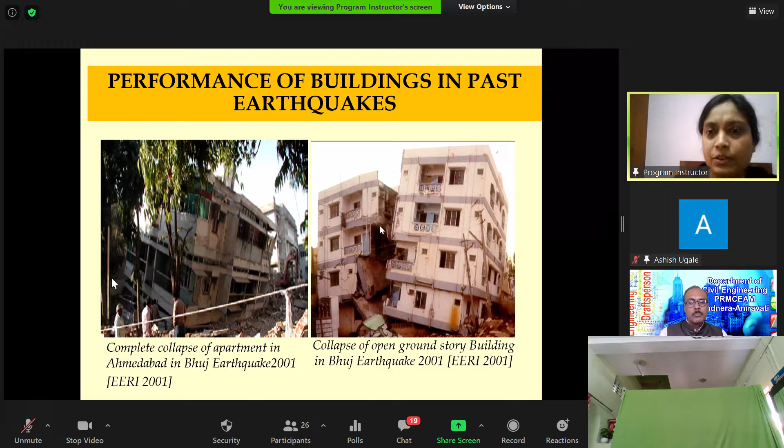Similar incident I can show. This is from Taksila apartment, also from the Bhuj earthquake. We can see two identical buildings side by side, but the left building is intact, whereas on the right hand side building, the entire ground floor has been demolished, and it is not in livable condition. The right hand side figure is from the 2005 Kashmir earthquake, and we can see the cracks

in the unreinforced masonry infills. Unreinforced URM infill is nothing but brick infill. We generally construct these as partition material, and they are generally not designed for by designers. This is nothing but some dead weight. We never consider these partition walls, URM infill walls, as structural members, so we only consider their weight in our design.

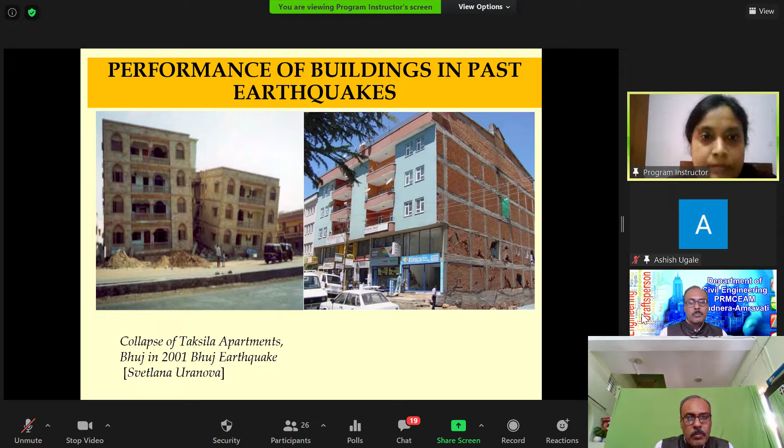But what happens under seismic load, that we will discuss. And since the topic is not only the behavior of URM infill RC frame buildings but the modeling of those, what is so special about modeling? Why do we want to do that?

Modeling, first, there are distinctly 3 different types of models available with us. It can be subdivided further, but if we just try to have a glimpse of the types of models, we have 3: the physical model, the analytical model, and the mathematical model.

The very first figure is of the actual structure, actual phenomena, as I have written, actual structure or physical phenomena. What happens is we want to model this, either as an analytical model, a mathematical model, or a computer model. In the computer model, what is happening, I will tell you. So when we are trying to simulate the actual structure, first we accept that

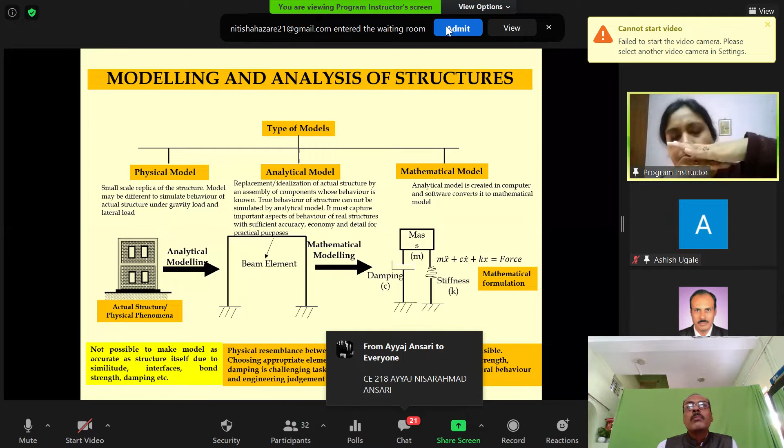it is not possible to model each bond between the reinforced concrete, that means the reinforcement and the adjacent concrete above and below it. It is not possible. It is also not possible to model the damping.

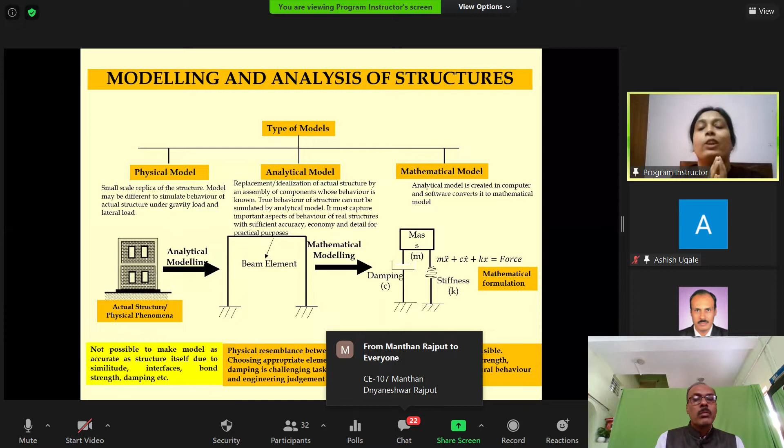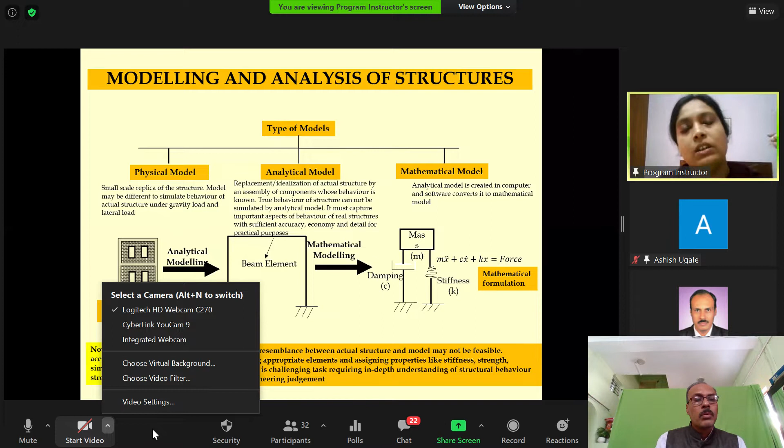What is damping? Damping is a cumulative phenomenon which opposes the movement of the structure when I apply some lateral load, and under that lateral load, the building tries to vibrate. This damping also includes the friction between the structural member and the air.

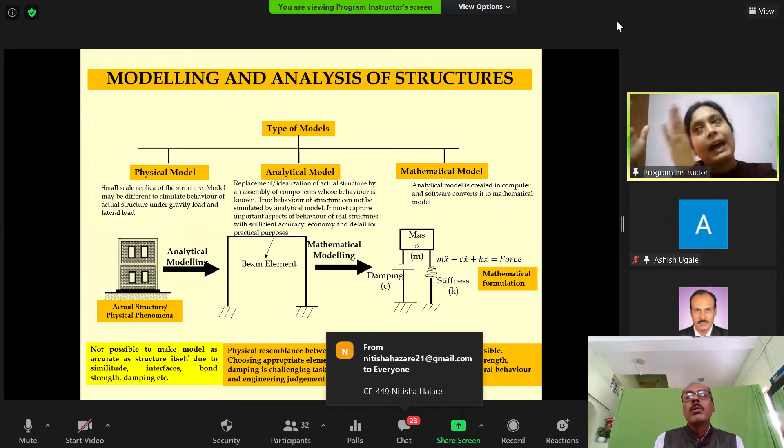It's the friction between the reinforcement layer and the concrete, the friction between the cracks, the micro cracks of concrete. It's so complex that it is not possible to model each and everything in the computer. But still we do.

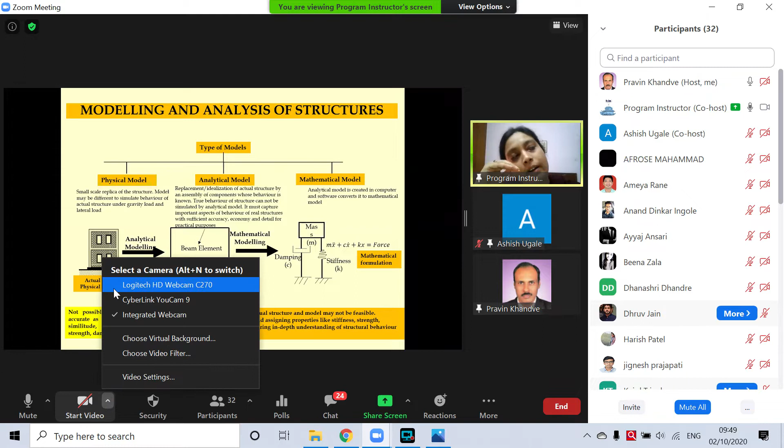The first thing is physical model, to understand the behavior of a particular structure under a specified load. That specified load we understand from codes and design guidelines. In case of Indian standards, it is IS 875, Part 1 to Part 5. Part 3 is for wind load, Part 2 is for live load, Part 1 is for dead load. There are many codes to understand what specified load a structure will experience during its lifetime. The physical model is a scaled model of the actual structure.

Why scaled model? Why can't we actually test a 4-story full-scale model? The very first reason is the cost, and then the equipment required. The prohibitive cost of this actual experiment forces us to model in software using an analytical and mathematical model. Even when testing a scaled physical model, we must keep in mind what behavior we are trying to understand. Let's say I want to understand the dynamic behavior. Then if I am applying lateral load pulses, what should be the frequency of the pulses of the reduced structure? What should be the bond between the reinforcement and the surrounding concrete in the reduced structure? What should be the size? It's not only the scale - a half scale model isn't just beam and column sizes reduced to half.

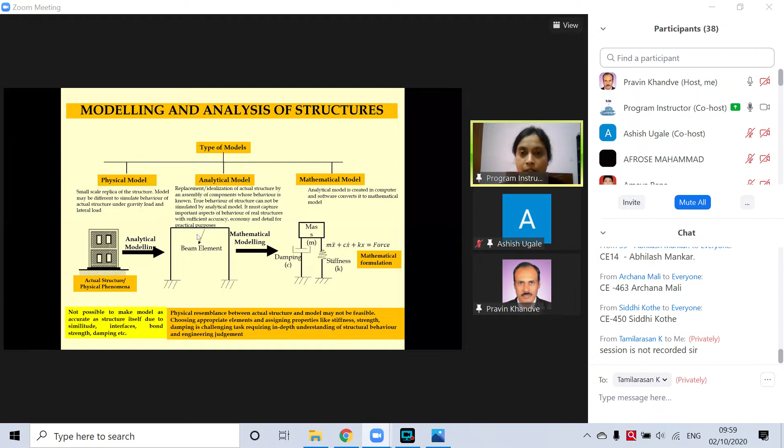With that background, I have summarized the modeling methods. There are three things: the classical method, where older designers used to apply thumb rules when there was no computer available, but we still had to design multi-story structures. So what did we do? We tried some basic methods. Those are gross, but they lead to a safer design. Then there's the approximate method and the computer-based method.

As I said, in the computer-based method, it combines the analytical model and converts it in the background to the mathematical model, so that it can solve the number of simultaneous equations created. And that simultaneous equation can be written in the form of a matrix, which we call the direct stiffness method.

And for some cases, like fluid or water flow in a river, the actual stiffness matrix method is not known, the actual behavior is not known. So what we try to do is visualize the displacement pattern and approximate it, and that is the finite element method.

All of us have some fascination about the finite element method, but it is important to note that the exact method is the stiffness matrix method, not the finite element method. The finite element method always gives us approximated analysis results. So if we know the exact stiffness of the structure, we should go by the stiffness matrix method.

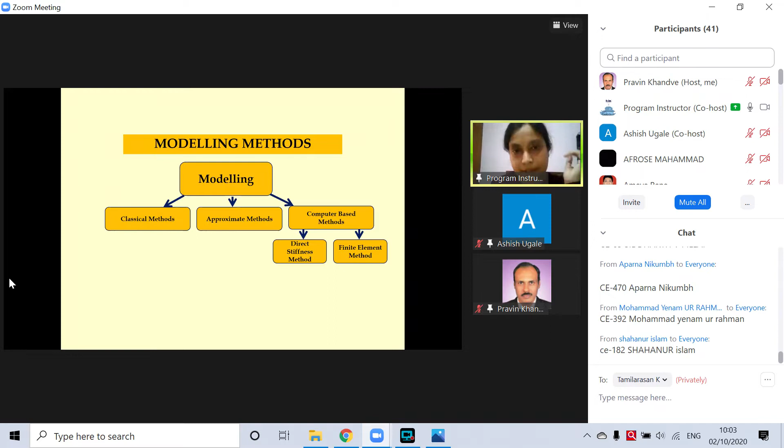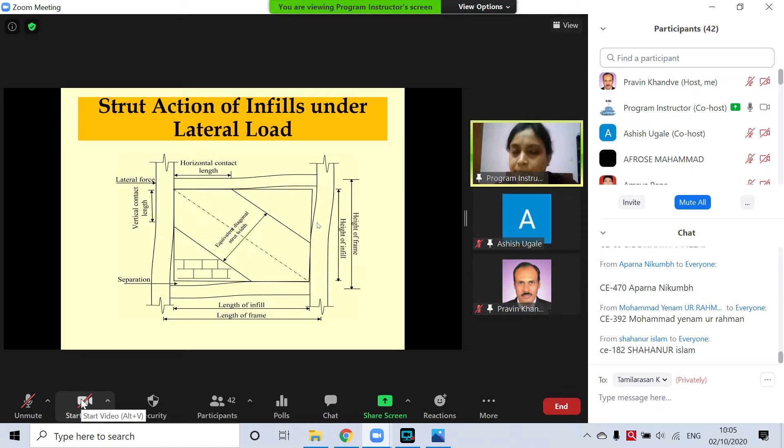We all know that the density of this brick material is very high, almost 20 to 22 kilonewton per meter cube, whereas the density of reinforced concrete is 25 kilonewton. So it is very heavy, and this panel is filled with masonry infill. Being very rigid, the displacement of this masonry infill under the same load is less, whereas the displacement of this RC frame material is higher. So we can see there is a separation of this infill panel from the adjacent beam-column frame structure, here above and here at the bottom. Because they are different materials, their load deflection behavior is different, so there is a gap between these two.

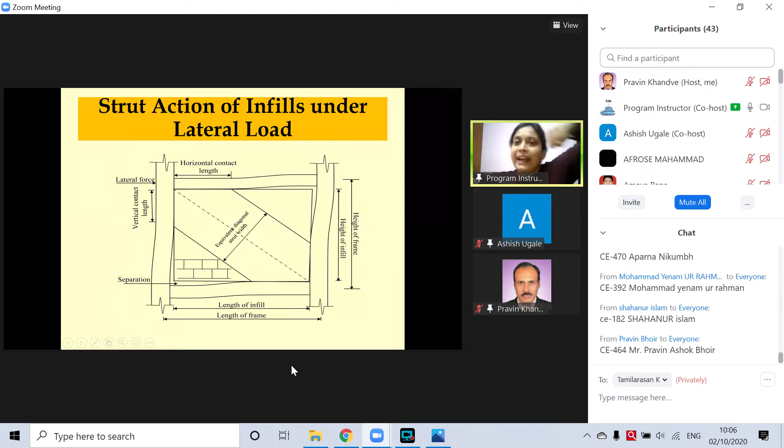Where there is a joint, when we apply load trying to push it diagonally, this diagonal is only attached with the adjacent beam and column. So when it is trying to deflect in this direction, it is pushing inside the infill, in this portion of the infill. And as we know, each and every action has an equal and opposite reaction, so what this infill will do is try to apply some negative diagonal pressure or tension.

Here in this diagram, we can see this is the bare frame. When there is vertical load P, lateral load V, in the bare frame we can see this action-reaction, tension and shear in this beam-column joint.

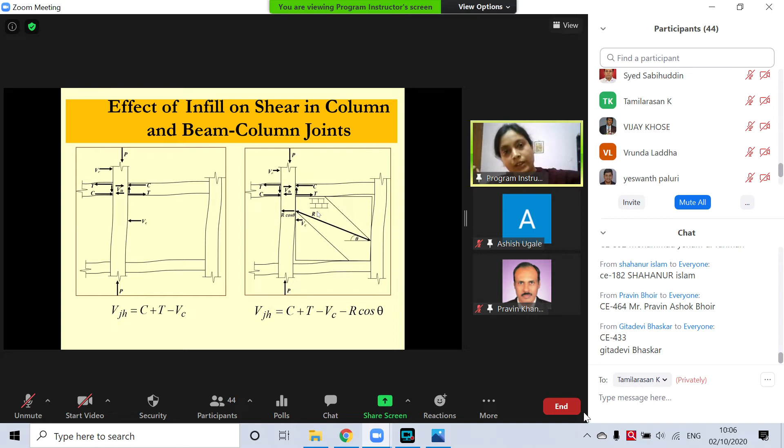But here, when there is masonry infill in between this panel, we can see there is additional shear force, because during the deformation of the frame, it is trying to push the masonry infill, and as a reaction, the masonry infill is pushing or giving tensile force to the adjacent beam-column frame, and it is diagonal. One component, the horizontal component of this diagonal, is causing R cos theta additional shear to the column, and R sin theta additional shear to the beam.

So this is the line diagram.

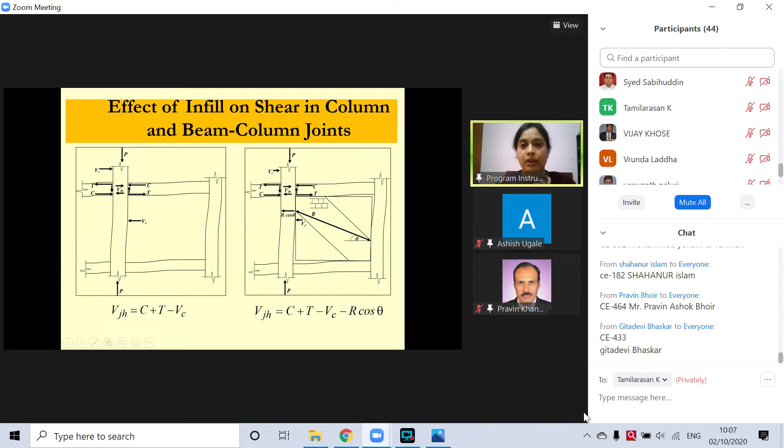Here in the analytical model, I said the analytical model is the idealization of the actual structure by an assembly of components whose behavior is known. But who is going to tell us the behavior? Like today, I am trying to design a very unique structure which has never been built before, so who is going to tell me what will be the behavior?

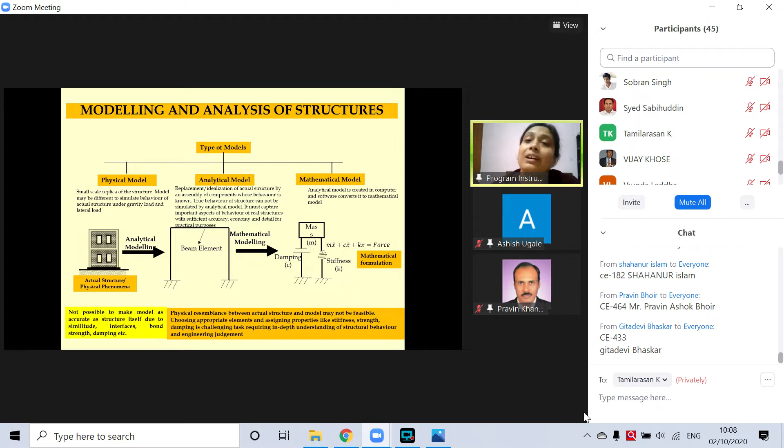The behavior we can understand only by two methods. One is physical modeling, the experiment. Another is we have to actually understand their behavior from the literature. Literature means books, codes, and if it is so unique that there is nothing mentioned, we have to go for research material.

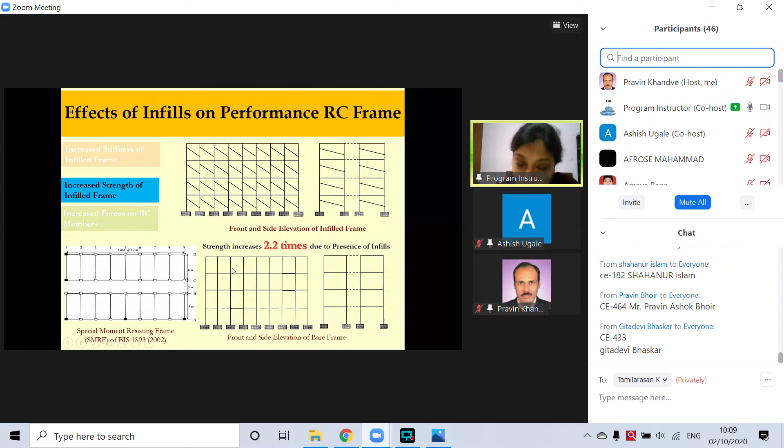So I have seen the stiffness of the infill frame has increased significantly when I am putting the infills. Very good. Increased strength of the infill frame - the strength increased 2.2 times for this 4-story building, 2.2 times when I am inserting the infills. That is also very good.

Increased force on RC members. As I have shown in the previous diagram, due to diagonal tension, the horizontal component of r cos theta acts as shear on the column. We all know from our RC design experience in BTech that we never design or check our columns for tension. What we take is axial load, compression, and biaxial moment at maximum. We never check for tensile force, but under lateral load there is additional shear force to the columns, which we have to take care of.

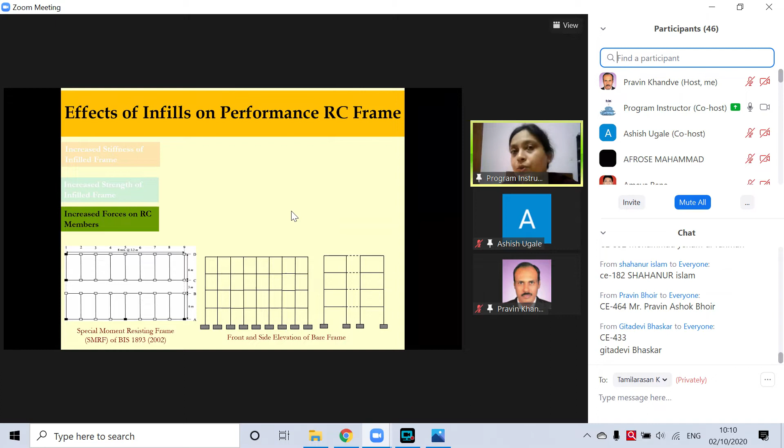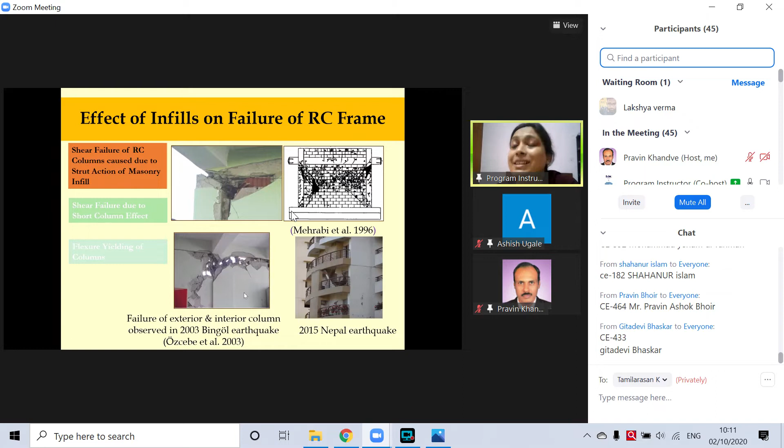Similar observations came from literature review of post-earthquake damage surveys all over the world - these are from the Bingöl earthquake, and these are from the experiments of Mehrabi back in 1996. This is from the 2015 Nepal earthquake, showing shear failure of an RC column caused due to strut action of the masonry infill. It is evident from the literature, both experimental and from actual structural behavior captured through post-earthquake damage survey, that this is a very common mode of failure - the additional shear, the 45-degree angle failure of the column, caused by the presence of the adjacent infill panel. This is one of the major prominent failures of RC frames due to infill.

Shear failure due to short column effect. What happens in the bathroom or even in the ground floor parking space of multi-story structures is that we keep the top few meters open for lighting or ventilation purposes. This example is also from the Sumatra earthquake, showing a portion of the bathroom. Only this portion is open - there is no infill, but below and above there are infills. So it acts with the moment here and here.

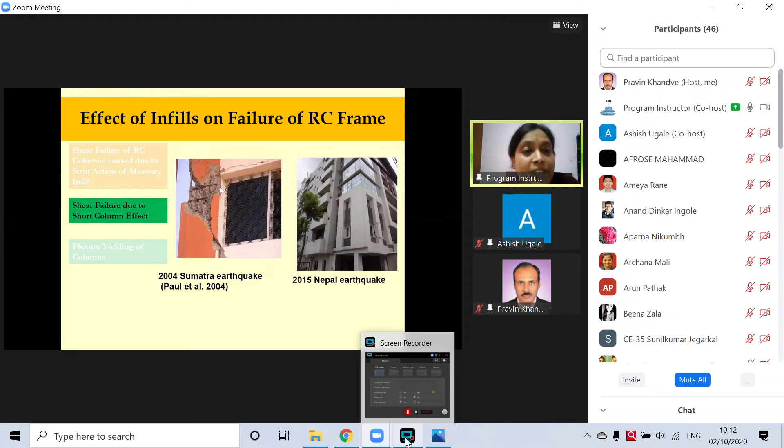When I reduce the column height, the shear force increases - it's very simple. That increased shear force, since the bar is not able to take that much shear force, it fails. So shear failure due to short column effect is also predominant under lateral load of seismic action.

There is another distinct failure we have seen, also observed from experiments or during actual earthquakes - that is flexural failure. Here we can see this flexural failure. What happens: one layer of brick, then mortar, then again another layer of brick, and the mortar is very weak. When I apply lateral load, since the mortar is weak in shear, it slides like this - the two layers, and one layer actually hits this, causing flexural yielding of the columns.

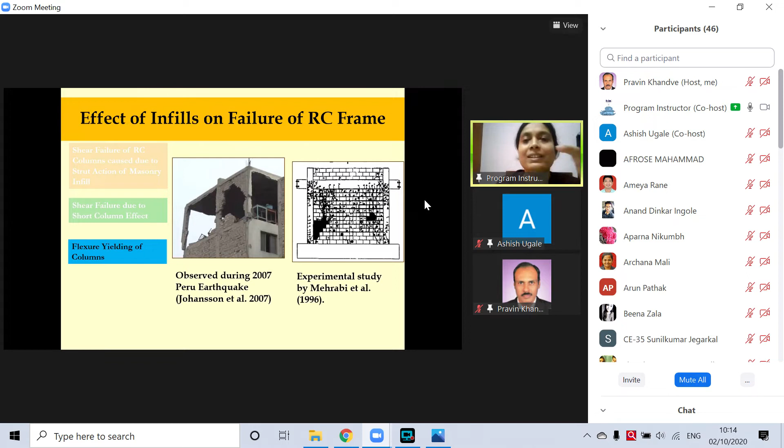So why do we need to understand these failure modes? We need to understand the failure mode so that I can make my structures avoid these possible failure modes. If I can stop the entire frame from failing in this mode, it will sustain. That's why we need to understand, from the literature and from post-earthquake damage surveys, what the failure modes are. That's why I have gathered this information, and in our design, our aim will be to prevent those.

Now, those are the practical behaviors we have seen. Now I am coming to the design philosophy - how the design code actually controls the failure of the structure, how they can ensure the safety of the structure under some specified load. In any structure, failures are classified based on observation, either as equal displacement principle or equal energy principle. This red dotted curve is the actual load behavior curve.

When we apply some lateral load, the vertical load is always there, and as we push this lateral load, it is not two exact straight lines - to make you understand, I have converted it into a bilinear graph. It will actually be some curved thing, but I have converted it into a bilinear graph. So this is the actual behavior of the structure.

What the equal displacement principle says: if the natural fundamental time period of the structure - meaning if the structure is at rest and I disturb it, it will go to some extreme, then neutral, then the other extreme, and come back - the whole cycle, the time taken to complete it, is called the natural fundamental time period. If that period is greater than 0.6, it is called a long period structure.

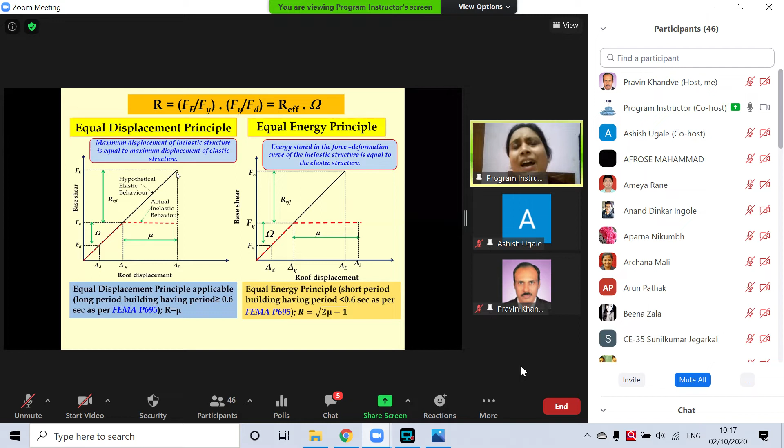Stress is equal to Young's modulus times epsilon, strain. But here it is not following that. In this hypothetical structure, this is the ultimate force because Fe is the ultimate elastic force due to earthquake. If I don't want any damage to my structure, let's say I have designed for that much force to make it elastic. So what happens? The ultimate displacement of this elastic structure will be equal to the ultimate displacement of this inelastic structure for long period structures.

What happened? The yield force is here because it is not following any linear Hooke's law. So yield force is here, and we have designed for much lower forces. How is this? Why is yield force not the design force? Why is yield force always higher than the design force?

Because of two things. When we are proportioning in RC design, we proportion the B by D of the members and the reinforcement. When we design, we know that if the section required is 230.1 millimeter, we go for 235 millimeter, because making shuttering for 230.1 millimeter is not possible. So we try to maintain the size identical, and by that process, the size is always given a bit higher.

And then reinforcement again, the actual requirement may be 10.1 number of 20 dia bars. We never give 10.1, we always give 11, on the higher side.

So those are from design. And even in analysis, we check the structure as if we design for IS 456 - what is the load combination? 1.5 times dead load plus live load. And what if we apply a load factor of safety of 1.5, and then also material factor of safety. We don't consider the cube strength as the actual strength in design, we reduce it by 1.5 times, and in steel by 1.15 times.

So there are four points which give rise to a higher yield force than the design force. One is material factor of safety, another is load factor of safety, third is the higher size provided of the beam column section, and the higher reinforcement - that will give rise to the situation where whatever forces I have designed for, it will yield on the higher side.

So the ratio of actual force to yield force, and yield force to design force, is the response reduction factor. I can reduce the actual force if it is available in the form of ductility, mu. In this figure, I can see this is equal to mu, R is equal to mu. And what is R? R is the ratio of actual force to design force. Similarly, in case of short period structures...

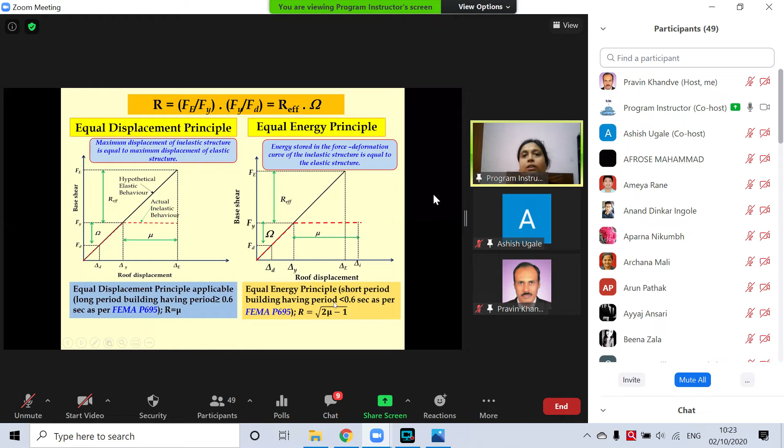In some very special structures, we may design for nuclear power plants and all, but for general structures, this nonlinear behavior is much acceptable. And that's why we have established the response reduction factor with the ductility.

Now coming to the code, how the code actually controls the design to ensure the desired seismic performance. There are three main parameters. The first is control of ductility demand, shown as control of ductility response reduction factor I by R.

What is I? I is nothing but the importance of the building. If it is a hospital building, which is very much required after an earthquake, people will rush to the hospital, so it should be operational immediately after the earthquake. So in that case, the importance of the structure or utility, power plant, those are very high, and we use an importance factor higher than 1. But for normal residential structures, the importance factor can be taken as 1.

So the effective response reduction factor given by the code is importance factor by response reduction factor. We can check the clauses in IS 1893 2016, Part 1, Clause 7.2.3 and Clause 7.2.6 on page 19 and 20. So this is one key issue by which it controls the desired seismic performance.

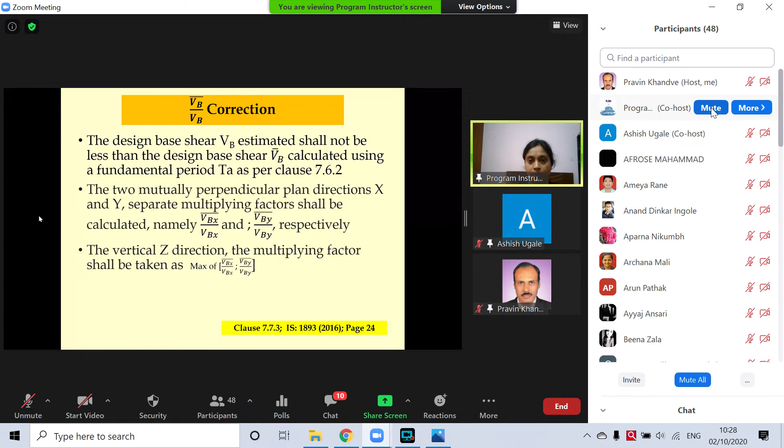The third is flexibility, that means the deformation control through the limit on maximum permissible interstory drift. These clauses are to ensure the forces and ductility. So IS 1893 Part 1 controls the forces and displacement.

As I've said, the ductility clauses are completely taken care of by IS 13920. So if we design only as per IS 1893 Part 1, we are actually ensuring only the force part. To make it a special moment resisting frame, we have to design it as per IS 456, as per IS 1893 Part 1, and as per IS 13920. Am I clear?

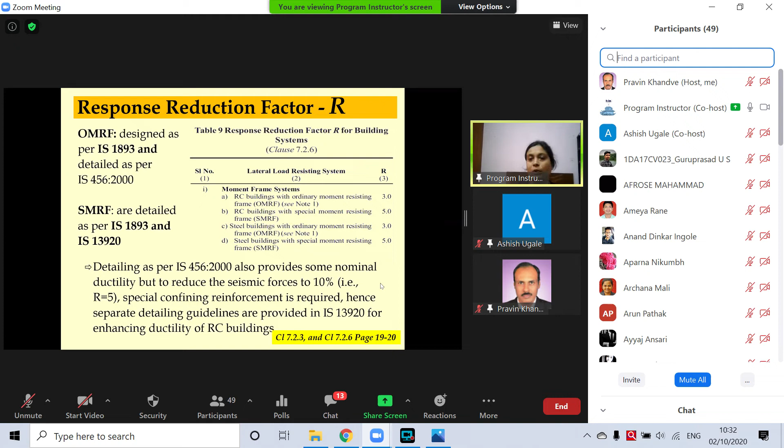Why do I have to satisfy the clauses for IS 13920? Even if we design for IS 456, that also provides some nominal ductility. But when your response reduction factor is 5, I am actually designing for 10% force only, and 90% I am relying on ductility. To have that much ductility, detailing as per IS 456 alone will not provide sufficient ductility. We have to provide some special reinforcement arrangement to get that ductility, and that guideline is given in IS 13920.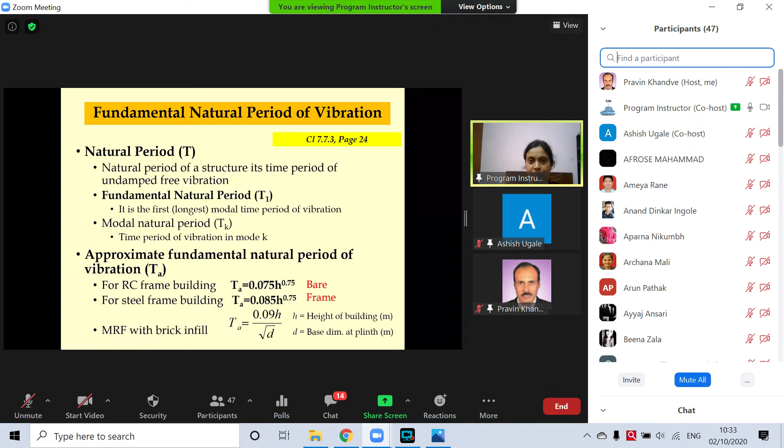So the first point, ductility demand, is discussed. Now, control of minimum design base shear, I have already talked about that. The code gives some empirical formulas based on observation, given for different types of structures. We have to find out, using the time period of the structure of our interest, the base shear using those formulas, as well as from our computer-based model. If the computer-based model gives us lower base shear, we have to at least design for that much base shear which comes from the empirical formula of the IS 1893 code.

That's how we will design for minimum design base shear. And how we control the flexibility - here I have also given, for your understanding, how we calculate it. I have shown VB bar by VB, and how we calculate the base shear. We calculate the base shear as horizontal acceleration times seismic weight, and horizontal acceleration is Z by 2, SA by G, and I by R. I by R is the effective ductility demand response reduction factor as per code.

And control of flexibility, yes. This horizontal seismic coefficient - Z is the zone factor, I is the importance factor, R is the response reduction factor, which I have already shown in table 9.

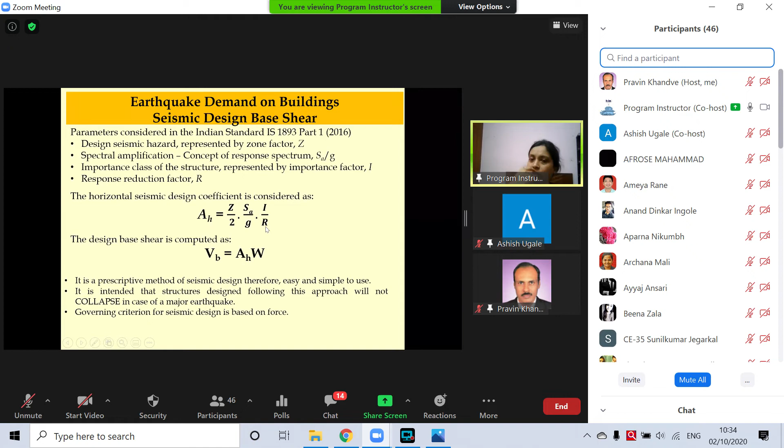Even in 2002, it was not present, because after the 2001 Bhuj earthquake, the code has been revised, and it has been observed that the seismicity is higher. So seismic zone 1 has been merged with seismic zone 2 in that edition. So there is no seismic zone 1 in the 2016 version, even in the 2002 version of IS 1893.

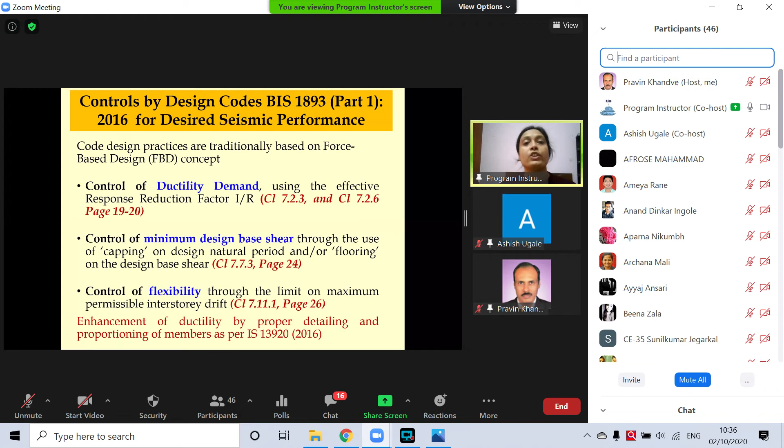Now I am coming to the third control of IS 1893 design control to ensure seismic performance: flexibility. What is flexibility? It is nothing but the deformation allowed. I have just copied the words from the code, on page 26. It says the deformation of RC buildings shall be obtained from structural analysis using a structural model based on the section properties given in clause 6.4.3. What are the section properties?

I will discuss what are the section properties, just give me 5 minutes. But it says how we will get the deformation - we will make a computer-based model and get the deformation under specified load. And the storey drift limit is that storey drift in any storey shall not exceed 0.4% of the storey height. But the clause says that when we are calculating the base shear for this, no load factor mentioned in clause 6.3 should be applied - it should be for load factor 1.

What are the load factors?

This is in clause 6.3, page 8 of IS 1893. These factors are given. The first factor, we all know. When we consider IS 456 for gravity load design, we always take this load combination: 1.5 times dead load plus imposed load. Imposed load is live load.

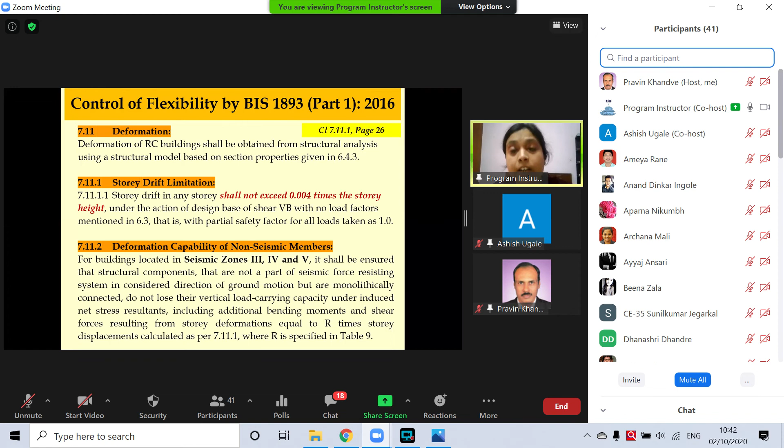And how will we ensure that? The shear force resulting from story deformation equal to R times story displacement. This story displacement is considered for load combination 1, I mean load modification factor 1. This should be multiplied by R times, and check if these non-seismic members which are monolithically attached can take care of that force or not. That's how it actually controls the desired performance of any structure. This is the gist.

Now we are actually moving to the modeling portion. These are the background, right?

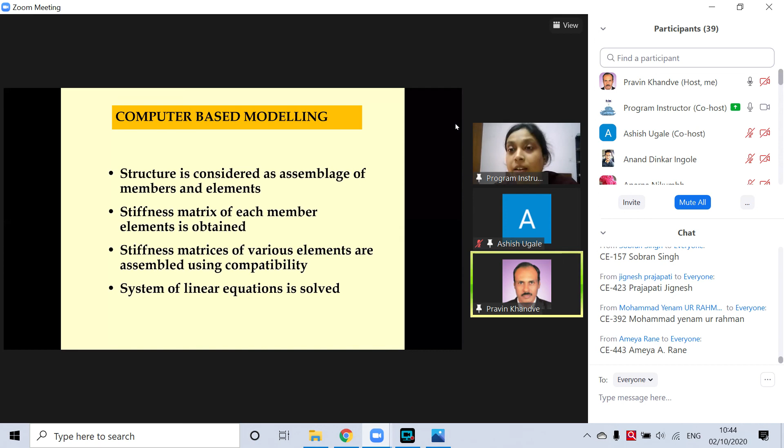Can you please elaborate what you explained for the 4th load combination? Was that the worst case? No, that was not the worst case. Any of these combinations can lead to the worst case.

For one particular member, if 1.2 dead load plus imposed load minus earthquake load gives the worst condition, for another beam it may not be the same case. It may be governed by a different case. That's why for each and every member we have to check all these combinations.

So to find out the worst load combination for a particular member, we have to summarize from whatever the maximum limits are, for the different requirements. So what will be the maximum force?

Force means moment and shear for a beam. Which case gives the maximum force for the beam, let's say shear and moment, we have to consider that one. To know what will be the worst for a particular member, we have to analyze the member for all these possible combinations.

I explained this with emphasis: if it is safe for 1.5 times dead load, then how can 0.9 times dead load be a combination? It will definitely be safe, but not under the stability condition that it will not overturn. In overturning cases, higher lateral load and lower stabilizing force, that is dead load, gives us the worst possible combination. That's why, although this is dead load and no imposed load is considered, it is another extreme where we check the stability of the structure under overturning and sliding.

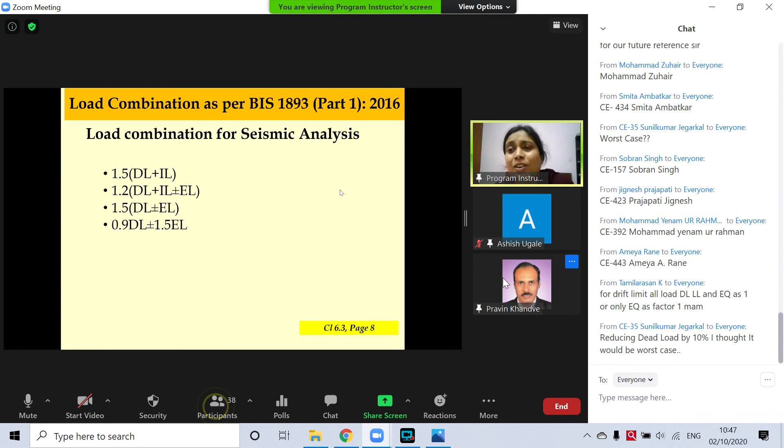Reducing dead load by 10%, I thought it would be the worst case. Not always - that's why it cannot be predicted so easily. That's why we have to run all these combinations when we are considering seismic analysis. When we are only designing for gravity load, we all know the first combination is the only one we check.

Any other questions please? I think there are no chat questions. Okay yes, there is one question.

Drift can be checked for EQ, yes, sure.

So this was the design philosophy and the guidelines the code actually gives - this is just how they control the behavior. Then we will come to the modeling part where we have to understand the behavior and for what behavior, how we are simulating the conditions the code has given.

I will mainly discuss the modeling guidelines given by the Indian Standard. I'm sure tomorrow there is a practical hands-on session by Dr. Vijay Khose. Yes, and with this background they will be able to learn, they will be able to analyze.